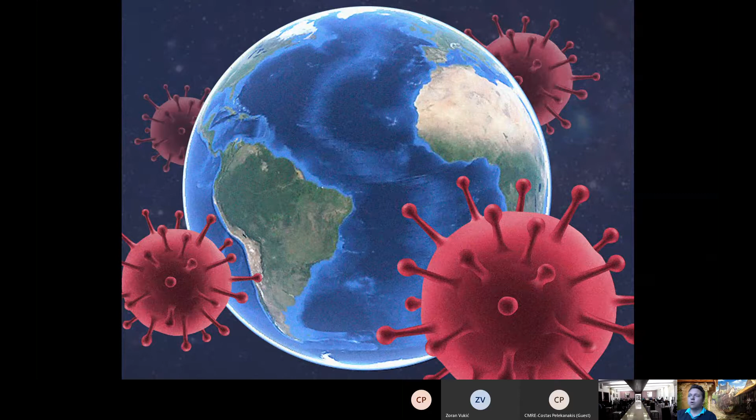Having said that, I urge all of you to keep social distance between you, to make sure that you respect all the measures that have been advised by our epidemiologists. I saw a few of you on the camera not wearing face masks. Please make sure to put your masks on while you are inside the hotel. You will see that our hotel did everything that's in their power to ensure social distancing. The room that you are currently in used to hold even more than 150 people. Now there are, I believe, less than 50 chairs in that room.

Also, you will see disinfectants, everything that can be used to wash your hands. So feel free to use them as often as you can. For the speakers who will be giving their talks, we also have plastic shields that will protect the audience or prevent any unintentional spitting during your talk. So for the speakers, make sure you use either your masks or transparent plastic shields during your talks. I do believe that I mentioned all the things that are required, that are relevant to the coronavirus

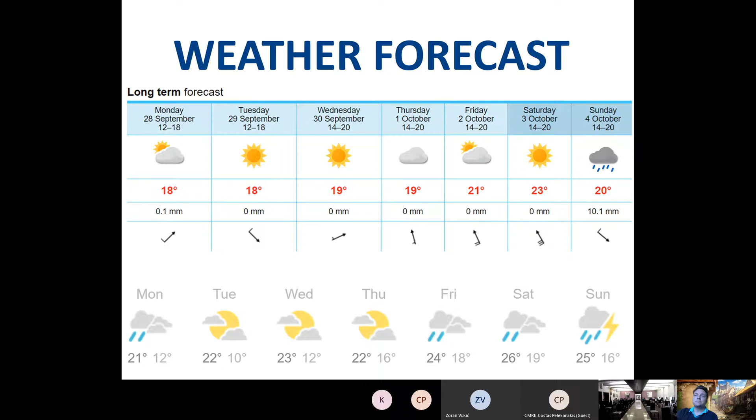The technical program, briefly. I would just like to emphasize that somewhere before March, we had finalized the BTS program for the year 2020 with all international speakers as we usually have at BTS. Of course, due to the pandemic crisis, after talking to our international speakers, we decided that most of these talks will be postponed for next year.

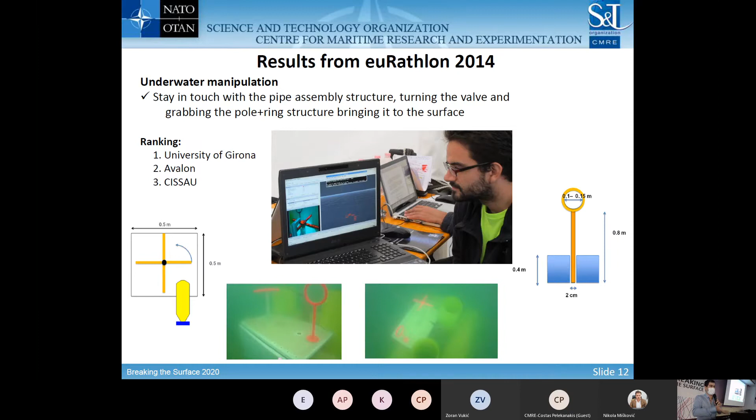This is the kind of task that we have. We have long-range navigation underwater, a mapping task, an inspection task, manipulation, which is the most complicated task to be solved. Then you have a combined scenario where you need to do all these missions at once.

Most of the vehicles are built by the students themselves, actually. So it's not professionally built commercial products, but it's good for the students to learn practical issues of marine robotics.

In 2015, as I mentioned, we had the first euRathlon 2015 Grand Challenge, the first competition in the world with land, marine, and aerial robots. We have a lot of supporters, institutional supporters, IEEE, both societies, Robotics and Automation Society, or Oceanic Engineering Society. We have all the institutional supporters from the Italian Ministry, region, etc.

And this was what the competition was inspired by. As I mentioned, it was inspired by the 2011 Fukushima accident. The idea was to have heterogeneous multi-robot teams and to actually create a cross-fertilization between domains, between land, air, and sea. I don't need to explain what happened in Fukushima, I think everyone knows.

This is just a schematic of what was the scenario. We had three main missions happening at the same time in land, sea, and air. One was to find missing workers. This could be either outside the building, inside the building, or underwater. Another one was to survey and monitor the area, meaning mapping, basically, finding some objects of potential interest. And the third one was manipulation, where both the land robot and the water robot had to close the valve at the same time.

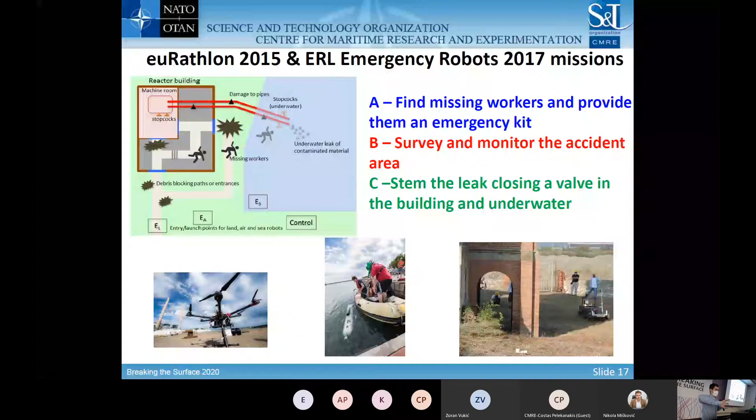Just to give you an idea, this was the area. It was an abandoned power plant. It was similar to Fukushima, but not as real as Fukushima, thankfully. We used also an old building, abandoned since the 60s. So it was a good scenario to explore indoor and outdoor.

And we have a protected harbor here, 100 by 50 meters, that was protected from waves. They had a break here, so it was a good scenario for the competition. Very realistic also, only half-meter visibility, and there were several issues because of this.

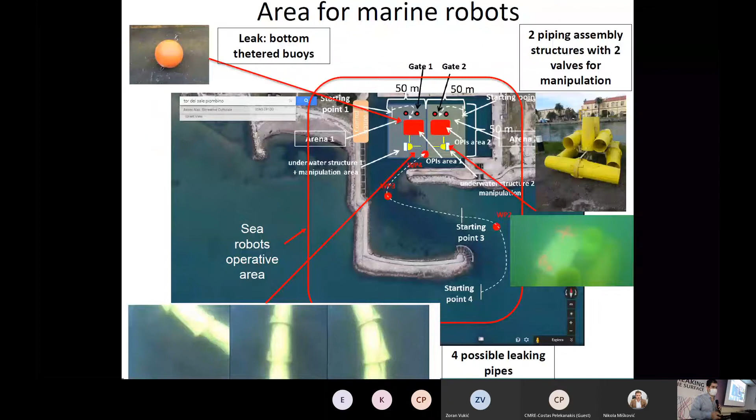And the distance, basically, the starting point was here, and the building is here. This is around 150 meters. So communications were very hard. Many teams had troubles with the Wi-Fi, basically.

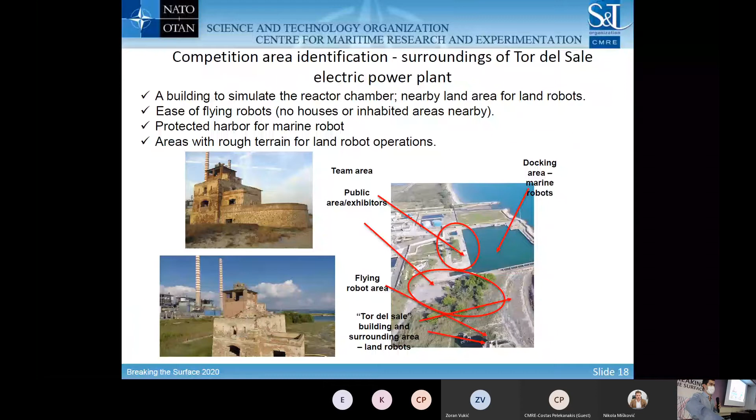Some teams had radio communication, so they went better. Some teams had two robots, one acting as a relay. Some teams had several antennas working around the way, so they could extend the range of communication. The building had really strong walls, very old walls, so indoor you would lose Wi-Fi and you wouldn't be able to communicate.

This is what they call a machine room, where the robots would go and close the valve. And this is just some pictures of the area to show you the setup. We had a pool for testing of the robots before we went to the water. We had a pontoon for easier deployments. We have some artistic pictures here.

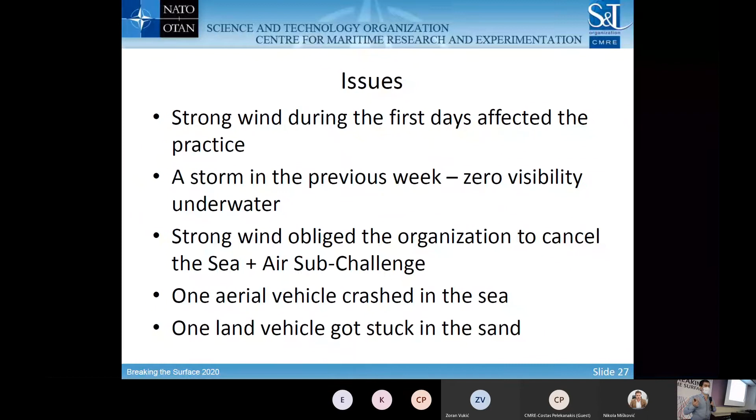There was some rain, so people would work a bit under the tables when they could. As I mentioned, we had a lot of issues, especially in the first days. We had strong winds, so air robots could not fly for the first days. We had a storm, visibility in the water was practically zero, about half a meter. We had a crash of an aerial vehicle in the sea, and one land vehicle stuck in the sand. So we had a lot of issues.

But this is an example. You probably see there's an orange buoy here, you can barely see it. That's how hard it was to detect anything in the water.

We also had a lot of success. We had 150 participants from the teams, above 300 robotics experts, 1,200 visitors, and 120 articles in the media, including specialized media. We did also a kind of robotics event, moreover than just a competition, with talks for the general public, exhibitors, schools visiting, and the DARPA Robotics Challenge winners coming. It was their first time in Europe. Here you can see the winner from KAIST in Korea, and this is the Italian team Walkman. This was just the first time they came, just before going to IROS to present their robots.

Now I'll speak a bit about ERL, the next iteration of the competition. European Robotics League is a novel common framework that mixes several competitions in Europe. We have indoor competitions, both service and industrial robots, and the emergency robots competitions. The idea was to have benchmarking between competitions, so these are a bit more focused on the scientific aspect and not only the educational aspect. The idea is that we can test the performance of robots through the competitions.

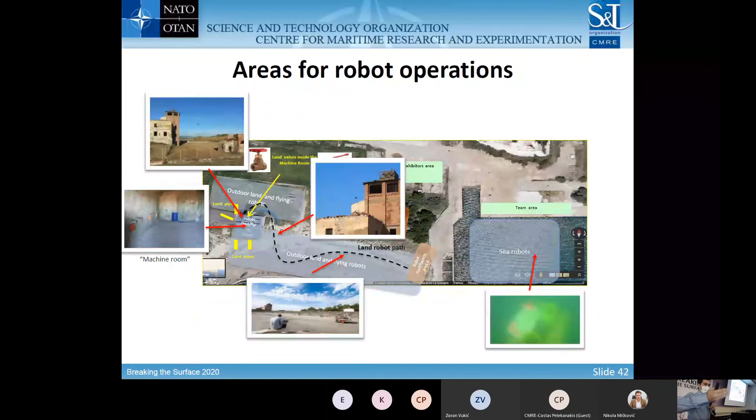The hardest thing here was communication between different domains from different teams. Most teams were not from the same university, so they had to prepare and make sure everything was connected and working very well to communicate between different domains. The area was the same, just some more pictures, but it was the same location. These are a bunch of technical results both from 2015 and 2017.

So again, visibility was an issue. This is the mannequin that you could see in the water, but in 2017 we managed to reconstruct it very nicely. As I mentioned before, some teams would bring antennas that would drop along the way to extend their Wi-Fi range, and this was a winning approach, I would say.

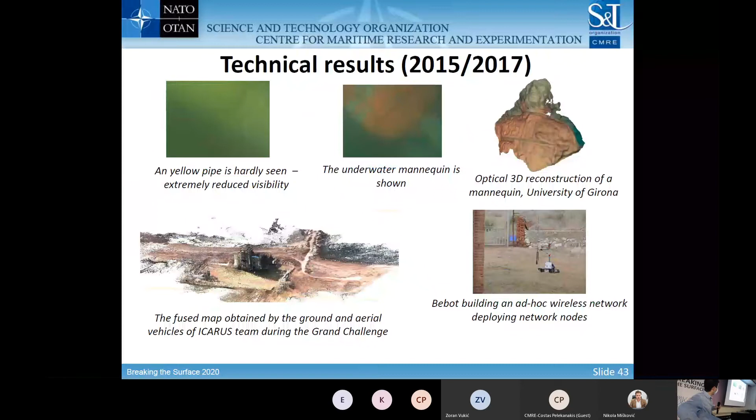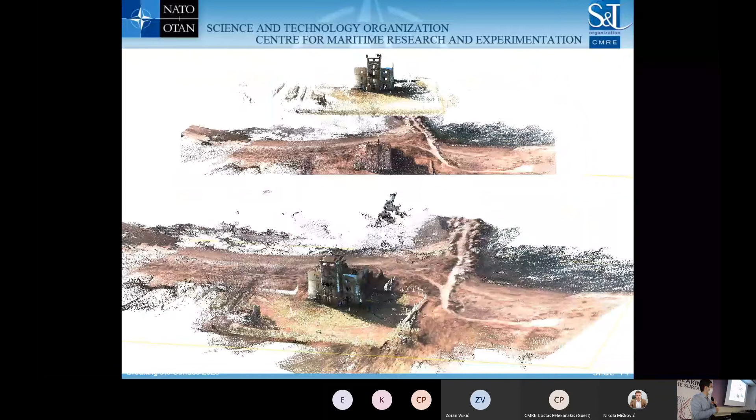You'll see this better in the next slide, but in detail, it's a fused map between ground and aerial vehicles. On top you can see the ground and aerial maps, and this is the fusion result produced. Teams had 2 hours to deliver the results, so this was made in 2 hours, by 2 different teams working in the same consortium. It's quite impressive what they managed to accomplish.

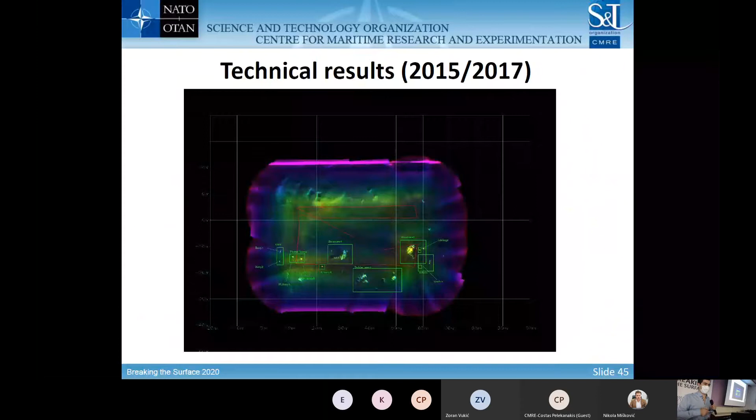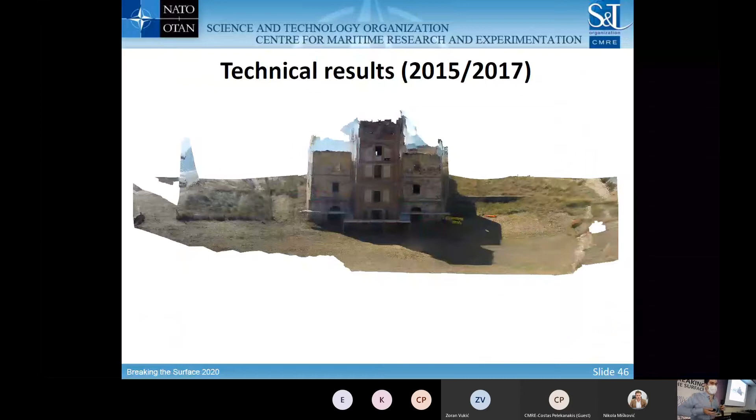This is another reconstruction from the building, this time with texture. Again, for the time they had to produce these results, it was pretty good.

In 2017, we had also robotics events similar to before, with a lot of talks, exhibitors, exhibitions of demos, and workshops for children.

So in 2017, we established a leading competition in Europe for emergency robotics. We had 17 different teams that formed 7 main teams. We also had industry helping us with the judging - for instance, University of Newcastle provided a tracking system for underwater vehicles. We had Texas Instruments, IEEE, also end users, so we tried to involve all possible stakeholders. The thing that is missing maybe for the future is having competitions as part of the curriculum in universities.

We have many students doing master thesis related to the competition, but it's not yet on the curriculum of any course in the university. We have many success stories along the years.

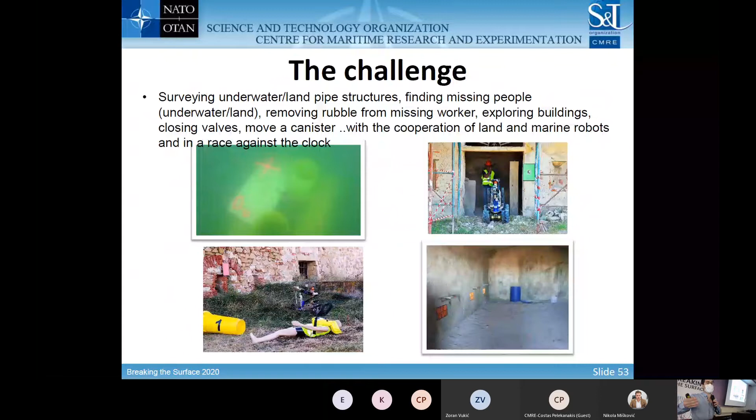So we always try to push the state of the art a bit further, while making sure that teams are still able to accomplish something.

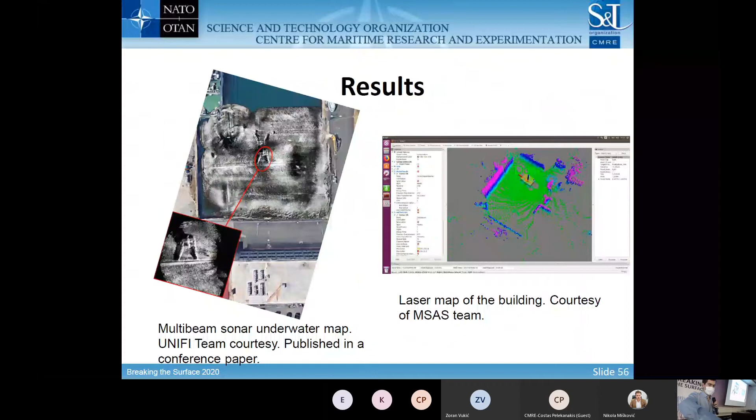The future is the METRICS project, and this project focuses even more on the methodological and benchmarking aspects. We will soon, early next year, probably launch a virtual competition, and then we will have physical competitions, Corona allowing, next July and then every year again. The idea is that we attract also the AI community, so we'll have virtual competitions and then physical competition every year, using real data to test and train teams in the virtual competition.

As I mentioned at the outset of the presentation, benchmarking is one aspect needed to test the performance of robots and to introduce them to the market. The other aspect is regulation. So I'll go through some slides regarding regulation, and this was also based on my background in political science. I won't go too deep on the legal aspects, so I don't bore you with that.

Let's see. Here. So,

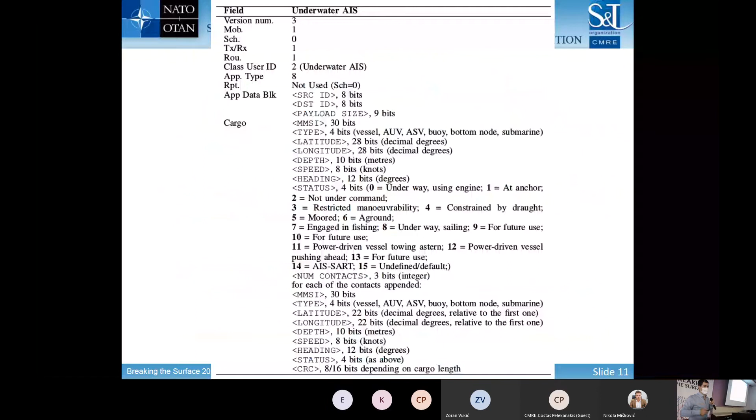So perhaps you know about AIS, Automatic Identification System, which is mandatory for all vessels and ships. We had a version of underwater AIS implemented with JANUS, and it was used in the past to give submarines a picture of vessels in the area. This has lat, long, heading, speed, status, and an identifier. With respect to the original AIS, with the JANUS AIS service, we have the depth and type of vehicle. This is the kind of message: basically you have an identifier, type of vessel, latitude, longitude, depth, speed, heading, the status. This is basically what you have in AIS, and then you can have more than one vessel in one message only.

So our idea is that underwater vehicles that are surfacing can passively listen to what's happening at the surface, if the surface ones are either broadcasting with the acoustic modem, or if there's a buoy broadcasting their positions, and then they can avoid a collision while surfacing. Similarly, when there's a lighthouse or an oil and gas platform, if these structures send their position, robots can avoid colliding with a fixed platform.

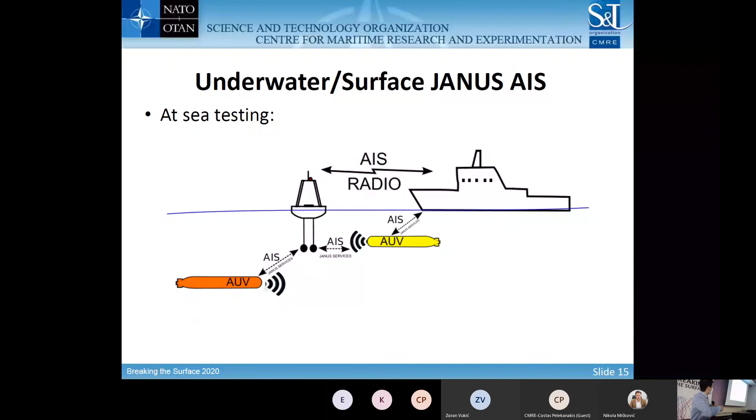Now AUVs and ASVs have acoustic modems. For manned vessels, it's not so common, but they could be installed. Or they could have gateway buoys that broadcast the position of the surface vessels to the underwater ones. We had some at-sea testing. This is a general scenario with 2 AUVs, a ship, and a gateway buoy. You have the surface ships transmitting with radio to the buoy, and then here you have acoustic communications.

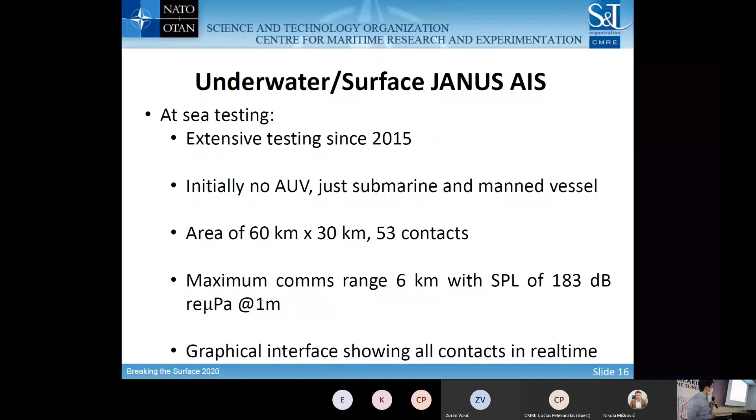There was extensive testing since 2015. Initially, as I said, just for submarines, but still, the important thing is that we got up to 6 kilometers range for this sound pressure level. Then later, we added the AUVs and the ASVs, and the range increased up to 7.5 kilometers in REP18. This was work done with Roberto Petroccia, who is sitting just next to me, and João, also from CMRE.

So, to conclude, the point is we need better regulation for ASVs and AUVs. The fact that we now have many ships has brought a lot of attention to this issue at the surface level, but underwater there are very few efforts. There's no authority and there are no collision avoidance regulations for AUVs. Of course, these are hard to implement due to the environment, but we hope that this initial work will help to have underwater collision avoidance regulations.

And I think I'm out of time. I have videos, it's late, so I don't want to make this later. Ten more minutes? Oh, really? Yeah. Okay. I thought you wanted to catch up. Okay. I mean, this is the last slide anyway.

JANUS is a standard that we can use to provide underwater AIS service. It's a possible way of implementing underwater COLREGs, and at the same time, we can also use it for better localization, planning, and emergency response. The idea is if all vehicles, including manned vehicles, have acoustic modems, you don't need a human in the loop anymore for collision avoidance, because everyone will be able to know where everyone is and will be able to change their course automatically by knowing where a possible collision is.

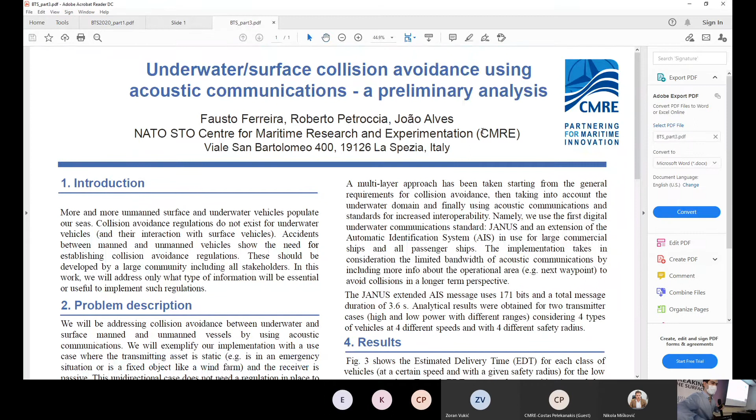Okay, so this is the same scenario. I just want to show you this part. So basically, this is a more advanced message of AIS. So if you think about underwater, you won't be able to communicate all the time or use a lot of bandwidth, right? So the idea is that in one message you send the most information possible, so you save sending a lot of messages. The idea is, what kind of information are you interested in underwater?

You're interested in the position of the vehicle, size, type, what's his route, maybe his area of operation, his maneuverability, and his autonomous level. So when you apply this to the underwater domain, we have categories: 3D position and accuracy of position, size classes based on the length and weight, type classes the same as we had before, speed and course over ground, autonomy classes based on vehicle type, if it's an ROV, an AUV, or an ASV, and then how maneuverable is that vehicle, what's his bounding box, basically its operation area, what's his mission type, if he's going zigzag, random search, or lawnmower, and what's his next waypoint, position and heading.

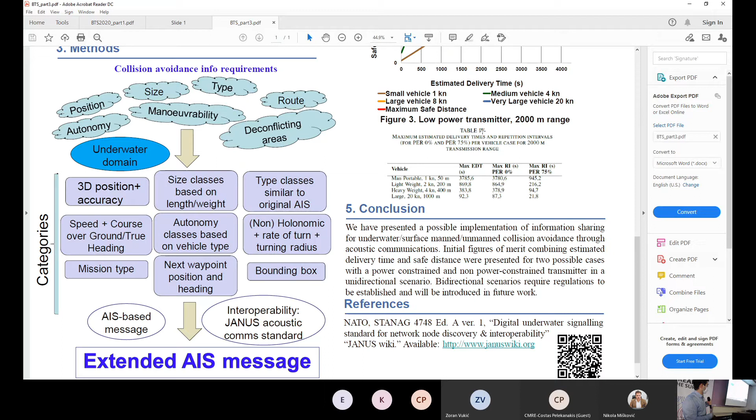If one vessel transmits all this information to another, they can not only prevent a collision next to each other, but a long-term collision, because there's also the bounding box at the next waypoint. So not only are you preventing a collision in a minute, you're preventing collision for the whole mission time. That's the idea. So with that, and with JANUS, we extended the AIS message I presented before, and we calculated how much or how fast you need to repeat this message if you want to avoid a collision.

So these figures of merit here are for the case of a low power transmitter in the 2 kilometers range, a fixed asset like a lighthouse or an oil and gas platform, and a moving vessel. And we have 4 curves for 4 different vehicles at different speeds. So we have a small vehicle at 1 knot, large vehicle 8 knots, then up to very large vehicle at 20 knots. These vessels need different safety boxes, 50 meters, 200, 400, 1,000 meters. And depending on how fast you're going, how big is your bounding box, you need the lighthouse to send a message more times or not.

So if you're in a small vehicle, the lighthouse can send a message only every 3,700 seconds. Because even if you lose the first message, you have time to actually prevent a collision before you get to the lighthouse. Instead, if you are a large submarine at 20 knots, the lighthouse should transmit the message every 90 seconds. And this is if there's no packet lost. If there's a packet error of 75%, then the lighthouse should transmit the message every 20 seconds, which is a lot and requires a lot of power. So this was just to evaluate feasibility.

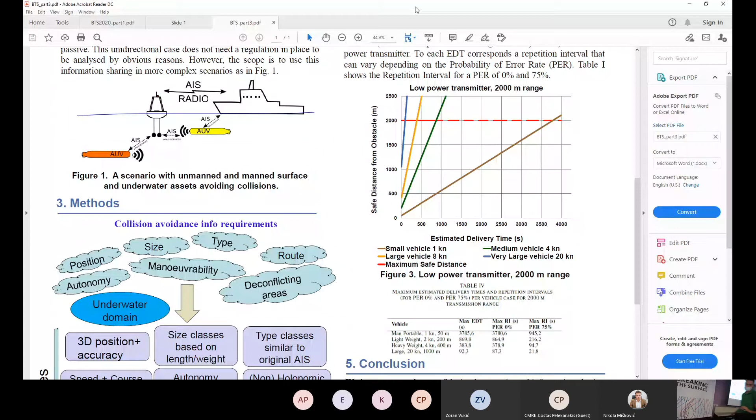Okay. Our next talk is related to underwater communication networks, and it will be given by two lecturers. Professor Antonio Pascoal from the University of Lisbon is one of the lecturers, a usual guest here at Breaking the Surface. Unfortunately, this year he was not able to come, so the lecture will be given online. And the second lecturer is Roberto Petroccia, who is a research scientist at the NATO Centre in La Spezia. Professor Pascoal, Roberto, the floor is yours.

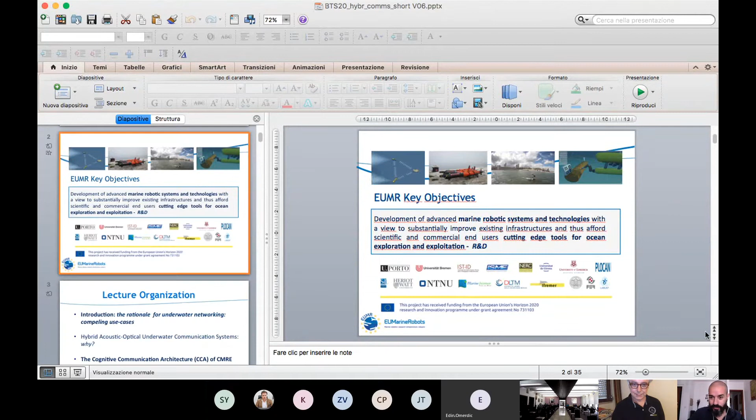Roberto, the next one, please. Yeah. The next slide? I'm on slide number 2 with the key objectives. Can you see it? No, it didn't change here. Okay, let's see if we get over technical issues here. No, that's okay. So you still see the first one or the second one? I see the first one, and probably everyone is seeing the first one. Roberto, I think that you are sharing from the screen. We all see your PowerPoint, but not the other. So maybe if you share the other screen. Well, trying. I only have one screen. Now it's there.

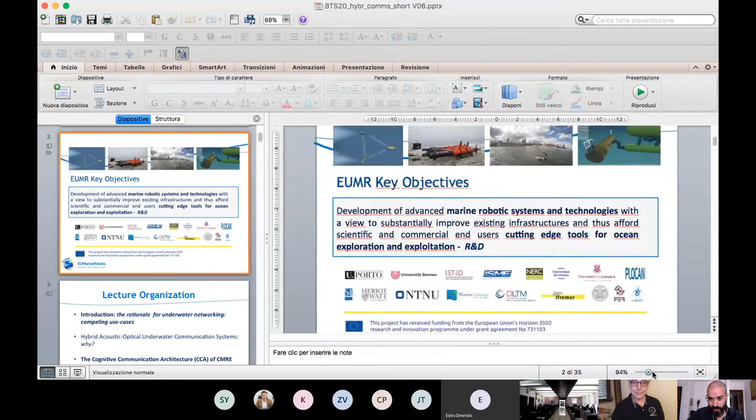Let's see if we can manage this way, because I don't know what's going wrong with the screens. Roberto, if you just share the PowerPoint, not the slideshow. Yeah, I'm trying to do that because I don't have any other screen. What do you see now? I see the objectives, but somehow the slide is cut. I can try to do it myself. Let's see if it's an issue with my computer, or if you try to share on your side, Antonio. Let me see. I think I have to click open share. Oh dear. So open.

Close share tray. I open share tray. We need permission. Go to settings. Oh dear. Screen recordings. It's asking me for a lot of stuff. I don't know. Oh man, this is bad. Accessibility, screen recording. Yes, I'm allowing this.

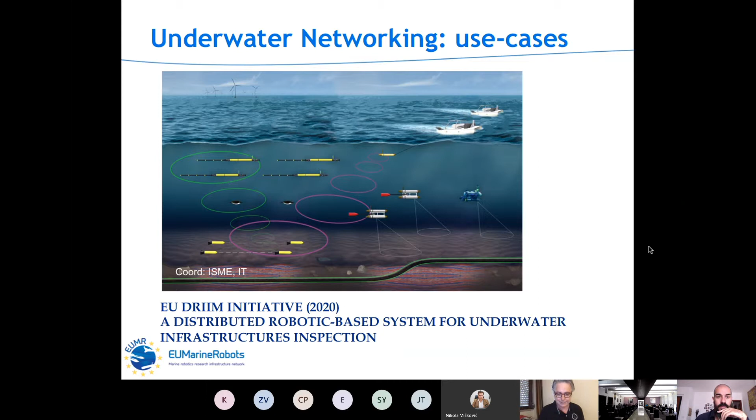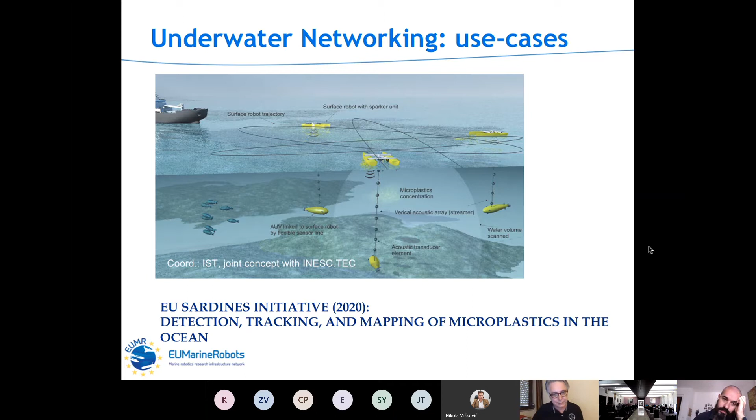This is an interesting initiative as well. It's for detection, tracking, and assessment of the spatial extent of microplastics. It's a bit strange because you have surface vehicles, underwater vehicles connected by these streamers with hydrophones, and all of them are emitting, and they are all receivers, so it works like acoustic tomography. And then they have to do some spatial maneuvering in order to find out what the size of the blob is. So again, it's a very interesting example of networking, okay?

Yeah, next. Oops. Okay. Okay, so Roberto, please, you can take it from here.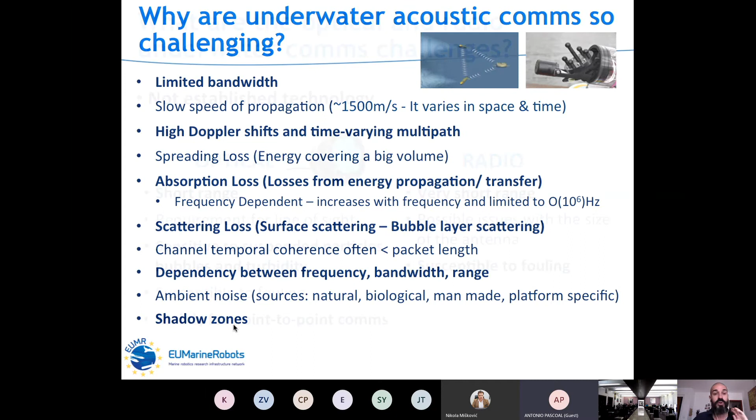It's a very dynamic environment. If we look at optical and radio, as I mentioned, they are not established technology. For optical comms, short range up to 10 meters; radio comms, centimeters. For optical comms, you typically require line of sight, so it's not very good in a network scenario where you need to share data with all your neighbors, so for broadcast transmission, but it's mainly for point-to-point. And then it's very sensitive to particles, bubbles, turbidity that can very much affect the quality of the comms.

Radio. Well, the big issue here is the communication range, very short. You can also try to increase that to a few meters, but then the big challenge is the size of the antenna. I remember there was some case where they were adding RF on AUVs, where basically you have the antenna going all around the AUV just to reach a few meters and be able to share data underwater.

So, Roberto, can I interrupt just for a second? Antonio, could you please mute your microphone? Antonio. Yes. Okay, Antonio, it was you typing like crazy in the background. Yeah, okay, go on. Sorry about that. Thank you.

So if we want to look at how we can improve comms in the underwater domain, first of all, if we have different ways to communicate, we should take advantage of all of those. As I mentioned, they have pros, but they also have cons. So the general idea here is "and" is better than "or". I would like to have acoustic and optical and radio rather than only one of those. And we need also to push a lot on the cooperation among heterogeneous nodes, surface and below the surface, because in many cases, if those devices are able to cooperate and change, for example, the topology of the network, you can already improve the communication and accomplish the mission.

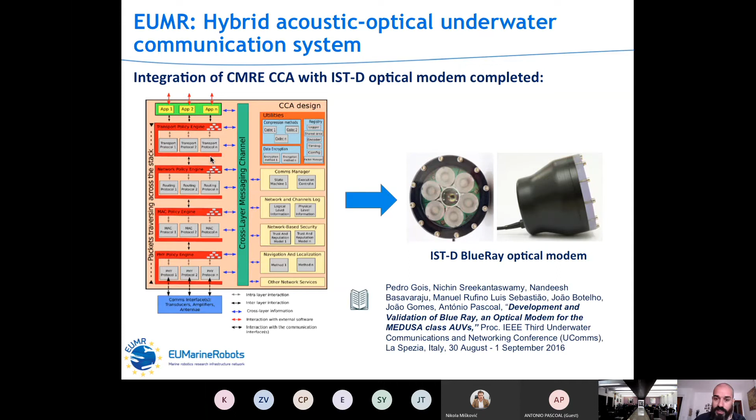What we did in EUMR, specifically together with the group of Antonio, was integrate the BlueRay optical modem developed by the IST group as one of the physical layer solutions of the CCA. So to have optical comms, the CCA also supports acoustic comms with commercial off-the-shelf modems, JANUS, which was also introduced before by Fausto, and radio comms. So we have heterogeneous and different ways to share data below the sea surface.

If we look at the BlueRay optical modem, the main driver behind this design was to have something low cost. The cost of material is about 300 euros, and also something very robust to background light, so that it works effectively close to the sea surface.

This of course came at the price of reduced range, and for Model 1 the bit rate was also a bit on the low side, 20 kilobits per second. But we are very eager now to start using Model 2, which should be able to increase the data rate by one order of magnitude or more. This will also be part of the work within EUMR.

To validate the integration, we conducted a few tests in the harbor, in the same area that was mentioned by Fausto in the previous slide, what we call the Loon area, where we have our testbed deployed. From the pier, we attached two modems to two poles and started increasing the distance. The modems were attached to fixed structures, and we were mainly interested in evaluating the communication range. We didn't test the angle or line of sight required for communication between the modems.

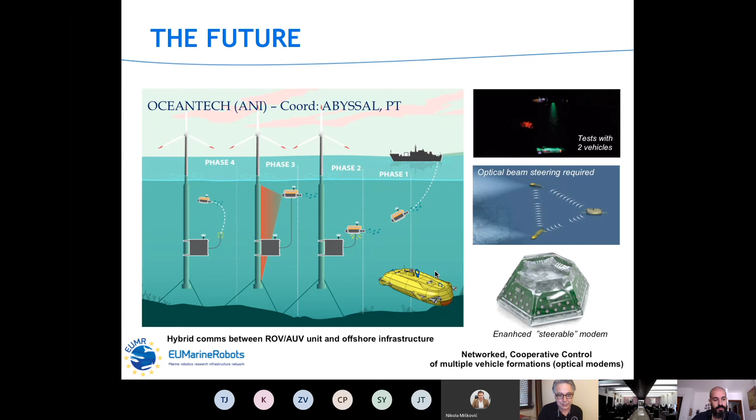At this point, we'd like to thank all the people at IST and in Italy, CMRE, that have contributed to this project. There are many. We are very, very thankful for all these colleagues of ours that contributed to different parts of the systems that we are testing.